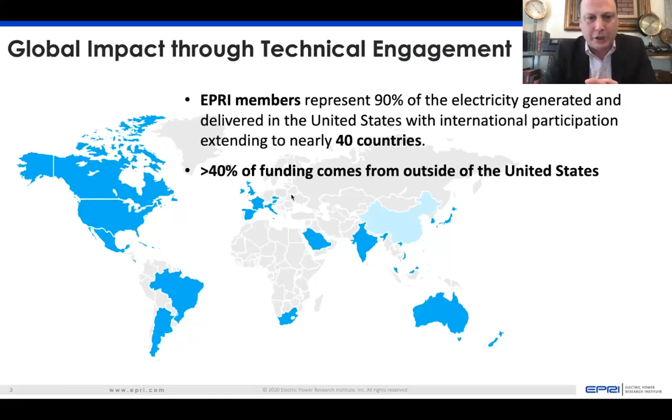Another important note in regards to being an international global research company is that greater than 40% of our funding comes from outside the U.S. So today my focus is on sharing some of the work we're doing in the role of flexibility and heat rate optimization. A lot of the work we do in the future is going to be based on the work that we've done in the past.

When you're looking at thermal efficiency and optimization, a lot of the actions and efforts that CenPEEP, NTPC, and other organizations in EPRI that I've worked with in the past still apply, but we've got to work smarter, not harder, and find ways to utilize the lessons we've learned in the past as we drive the future going forward.

In regards to flexibility, EPRI has been studying flexibility for the past 40 years. Anybody who's a member of EPRI knows that in 2021, we actually have some new programs that are going to be part of our generation portfolio. One of those new programs is on flexibilization as well as heat rate optimization, in our 223 fleet optimization strategy program.

So I want to share some of those visions for how you apply that towards best practices for heat rate and flexibility. There are three different core areas that I think are critical for India, and anywhere around the world, in regards to how you manage a heat rate and flexibility program simultaneously.

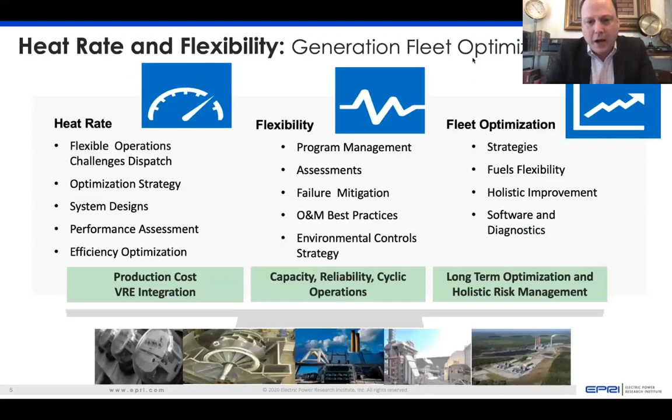Two of the major trends that demand optimization in regards to flexibility, as we heard in the opening speeches today: over 370 gigawatts of total generation in India, majority of that being subcritical, supercritical coal generation. So we've got to be able to sustain that fleet, and we've got to learn to become more adaptable to meeting the mission profile demands of what it takes to keep the grid stable as we continue to integrate more variable renewable energy into that grid.

What that means is that we're going to see a lot of older plants, and even new plants, either in reserve shutdown or cycling, and in some cases two-shifting, which is going to drive capacity factors down. Typically the heat rate trend is, as we drop down below 50% MCR on our operations and our capacity drops, you see an exponential increase in heat rate. So how you manage heat rate degradation, and what your strategy is around optimizing efficiency under flexible operations, is a key area of research that we're focused on.

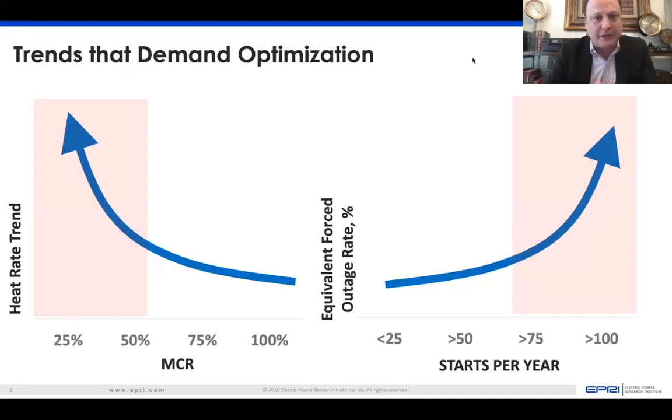But the other side of the coin is that as you have more startups and shutdowns, it's going to likely impact your EFOR. So as we continue to advance new generation and drive new technologies, I think it's important that we understand these two main trends that have to be adapted to make sure we've got a sustainable fleet going forward.

For the past two decades, I've been engaged with the Indian marketplace and worked with NTPC extensively on CO2 reduction programs through DOE initiatives or past USAID initiatives. And I'll say that those same principles we've applied over the past 20 years, whether it's applying the essentials of combustion optimization or heat rate essentials on how you manage a heat rate program and how you track boiler losses and turbine cycle losses, are still important.

We just have to be able to understand how we do that now in a flexible manner. So I think one of the key points in managing heat rate and flexibility simultaneously is to understand how to track those losses and how to track those key performance parameters in regards to both efficiency as well as flexibility. And how you do that needs to be applied into a systematic approach.

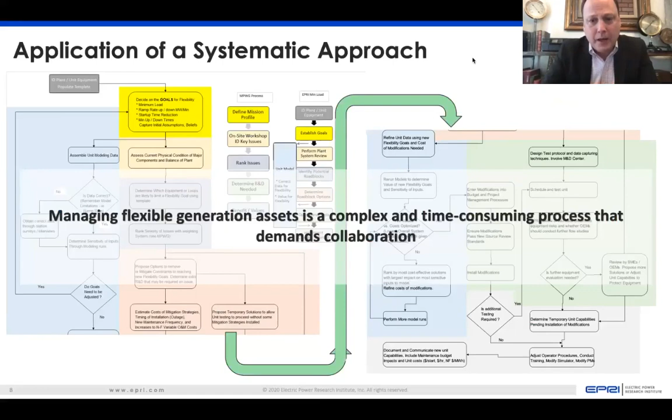Over the last 40 years, EPRI has worked diligently to drive a systematic approach towards flexibilization. That approach is complex, and it's a time-consuming process that demands collaboration. So as Mr. Banerjee shared in the last presentation, the strategy that I have proposed to India to drive improvements in regards to flexible operations is to really focus on the core fundamentals of flexibility.

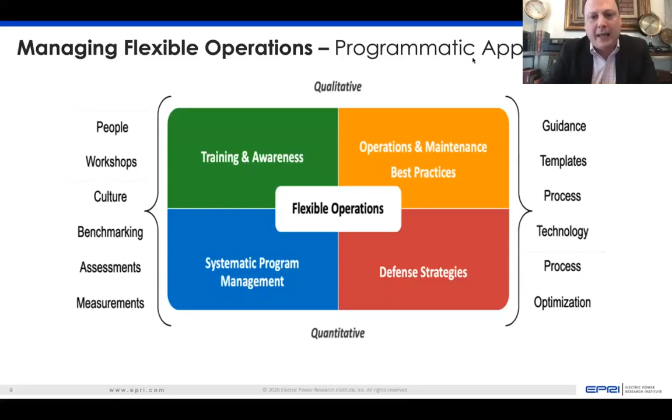Those core fundamentals represent the integration of training and awareness, how you apply operations and best practices to the fleet, what types of systematic program management efforts are required, and ultimately what your defense strategies are going forward - and how you apply those strategies is really how you drive the culture of people. So opportunities and events like this one are an opportunity for me to share that approach.

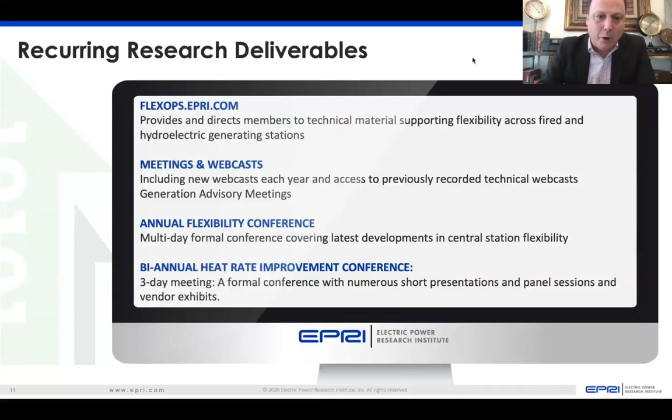So as we go forward in P223, I think one of the key important deliverables will be to continue sharing a database of information from past lessons learned, continuing meetings and webcasts virtually. We're finding that this is the new normal. And then also making sure we have the latest technologies and best practices being presented in both our flexibility conferences and our biannual heat rate improvement conferences that are instrumental to the EPRI portfolio.

So another area, something we've discussed widely in being able to drive those best practices, I think, is using technology and platforms to disseminate those past lessons learned.

Some of the areas we're looking at expanding in P223 is a flexible generation video series that helps visually understand the challenges with flexibility, what that looks like in regards to how you adapt to those changes, and most importantly, making sure industry understands the precursors to those damage mechanisms, so you can help balance and offset the potential implications of flexibility, as you experience more challenges like thermal fatigue and layup corrosion, how you manage heat rate degradation, common operator challenges, and when your units are offline, how you're managing your layup strategy and balance of plant O&M.

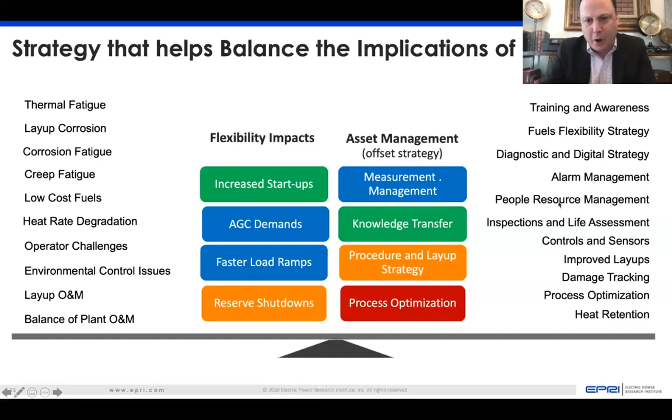So you've got to have an asset management offset strategy that looks into four key areas in regards to measurement, knowledge transfer, and process optimization on applying these strategies to help offset potential damage. But to do so, you also have to have a set of guidelines and templates.

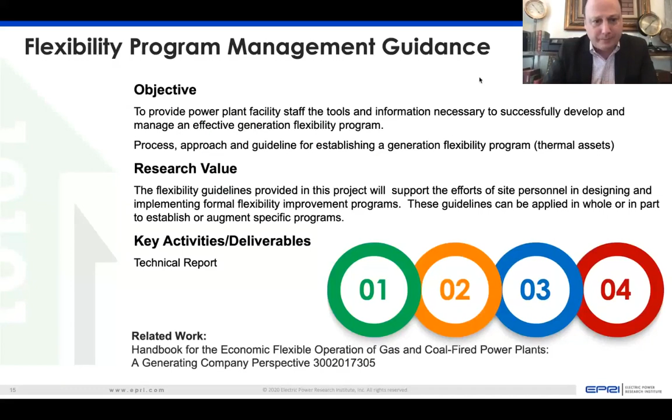Another key focus of flexibility: anybody operating a fleet of generating units should have a flexibility program in place and a set of guidelines that helps you successfully manage that fleet and those assets, taking past lessons learned as we continue to drive the future with state-of-the-art technologies that my colleagues are going to present in the next sessions, as well as some that were discussed earlier with the DOE Coal First initiatives.

That brings us to benchmarking assessments and measurements. If we want to benchmark and manage our assets from a flexibility standpoint, I think the real key is integration of people, process, and technologies, taking a systematic approach, applying it to how we hit those core four components towards achieving resiliency, asset flexibility, and most importantly ensuring viability of the flexibility so that we can drive those key flexibility attributes towards a fleet and make sure we're taking those lessons learned and applying that.

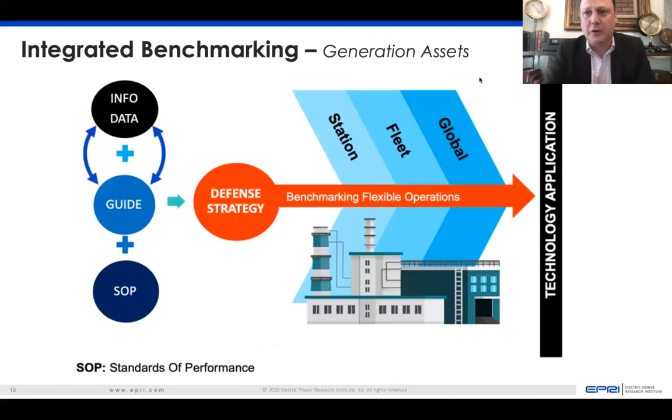One other area we've been working hand in hand with NTPC on, as a true industry leader, is to develop a set of benchmarking templates for conventional steam generators. It's essentially a platform where we can collect information in a timely manner, have a guidance document, a set of standards of performance, and integrate that into our defense strategy to understand how good a job we're doing on managing flexibility, whether at a unit level, a station level, a fleet level, or globally in regards to the overall session.

It's important for me to also acknowledge that this work is a U.S. DOE project supported under the Power and Energy pillar under the India Strategic Energy Partnership, which is co-chaired by DOE's Office of Fossil Energy and India's Ministry of Power.

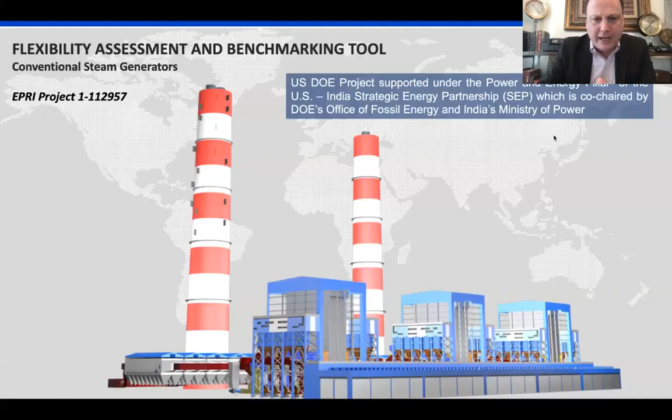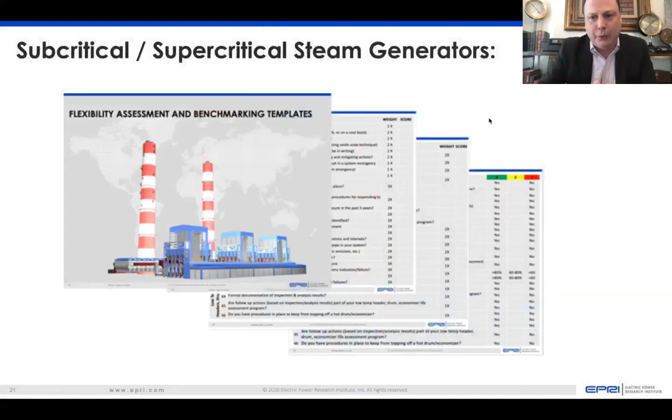I'll give you a quick overview of what that set of templates looks like. Right now we're building a set of templates that includes 10 different templates for 10 different areas of subcritical and supercritical generators, with a process for risk management, taking those lessons learned that we've identified through past work that EPRI has done through the Missions Profile Working Group and through many decades and years of research.

We're integrating that into four core areas in regards to those conventional steam generators: the boiler, the turbine generator, the balance of plant, and environmental controls. So we've separated those four core areas into 10 templates to really focus on how you digest the complexity of flexible operations and how it impacts nearly every part of a conventional steam generator, whether you're talking about the controls, the operating mode strategy, the O&M best practices, or even the cycle chemistry and balance of plant. It's important that we understand these are critical.

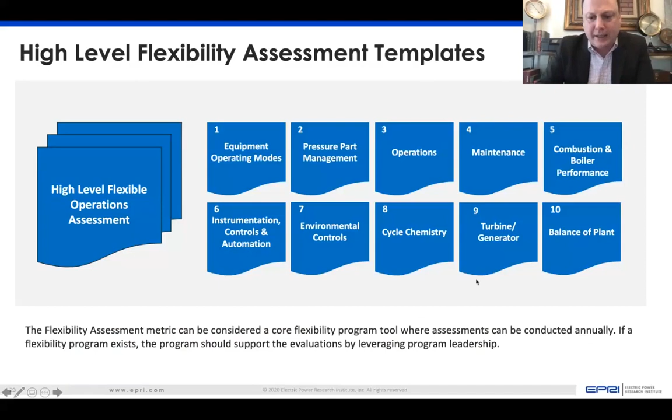Right now, the current status of the tools is over 615 line items of key lessons learned that we have integrated into these flexibility templates, where you have an opportunity to put a weighted value on different component areas that need to be addressed. When you do an annual assessment, you can classify that, and ultimately it's a tool that helps scorecard your performance in regards to flexibility.

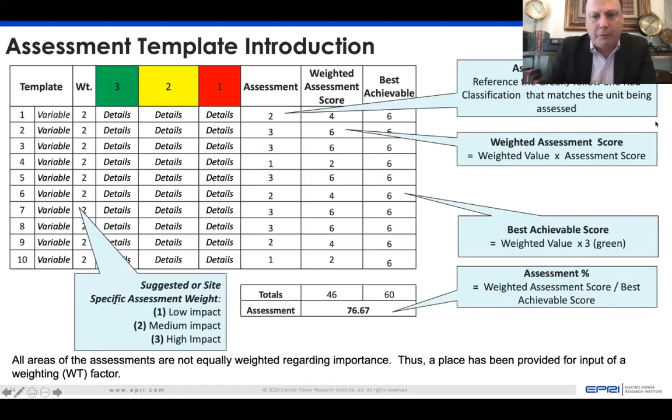So when it's all said and done, to be able to manage a fleet's flexibility, you can identify potential gaps or degradation in certain key areas so that you can understand where you really need to prioritize your resources and teams to become more flexible, and how you can mitigate some of those damages or precursors to damage mechanisms before they become a more significant problem. It's essentially a tool that has a multi-directional purpose. The flexibility tool can be used for risk management.

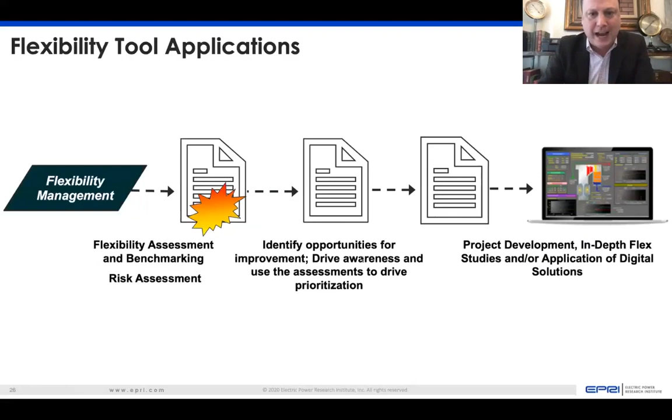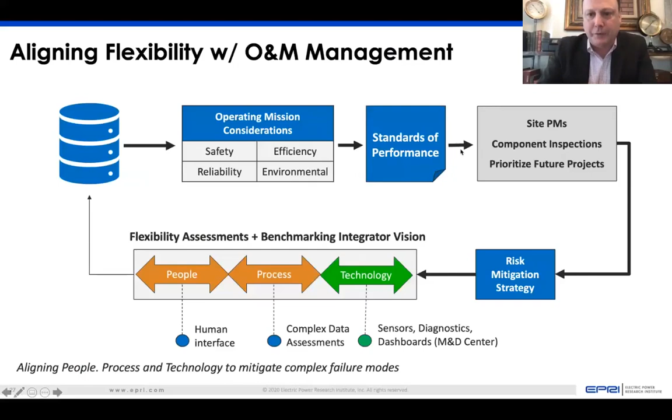If you integrate this approach of applying standards towards people, process, and technology, you can drive this into your risk mitigation strategy along with a database of information over time that supports the EPRI mission, which is also the mission of most utilities and generators I've worked with: to generate safely, reliably, efficiently, and environmentally consciously. Then you can take those lessons learned as standards, prioritize them, and drive that into your future project developments or future research.

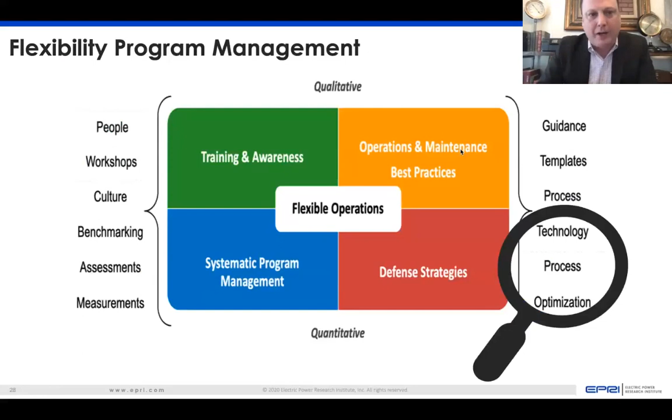The 4th quadrant of the core 4 fundamentals of flexibility is application to defense strategies. This is where technology and process optimization comes into place to help us take our aging fleet—many units in the U.S. are over 40 years old on conventional steam generators, and there are many older units in India too, with uncertainties on whether they're going to operate for 5 years or another 25 years.

So if you want to operate flexibly with an extended amount of life, you've got to take a look back in time. I'll share a scenario of GADS data, where we looked back at 35, 45 years of data of units that had 40 to 50 starts per year operating under a very flexible operation scenario. You can see the boiler is where you'll see a number of the potential damage mechanisms appear, and this is also my experience over the past two decades.

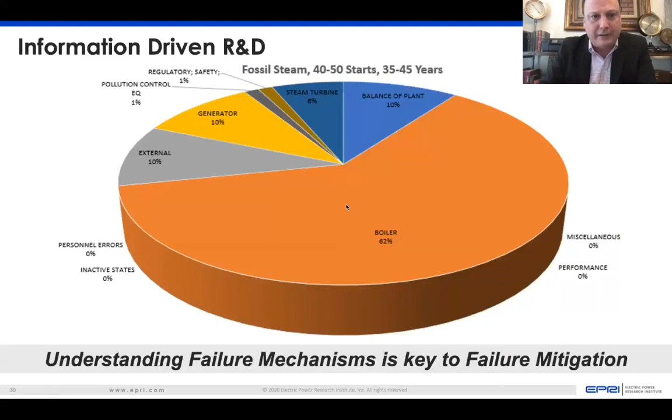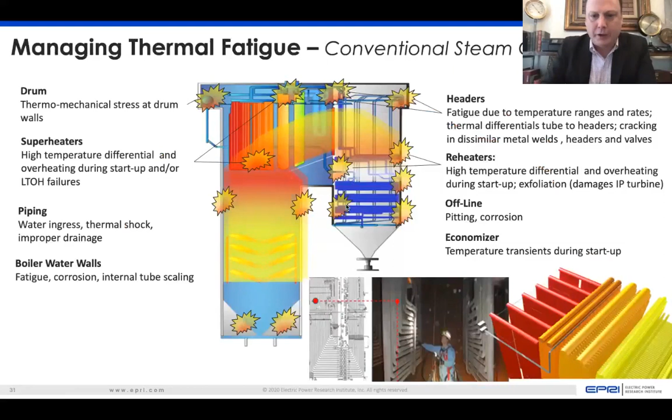So implementing fundamental approaches based on lessons learned—how you manage thermal fatigue, where the critical thermocouples are, what are the critical temperature differentials from side to side, left to right on major components, what protection systems you must implement and maintain to preserve performance—all that for a given set of standards of performance that take into account material temperature ratings, heat transfer, velocities, and circumstances that may relate back to a site-specific challenge.

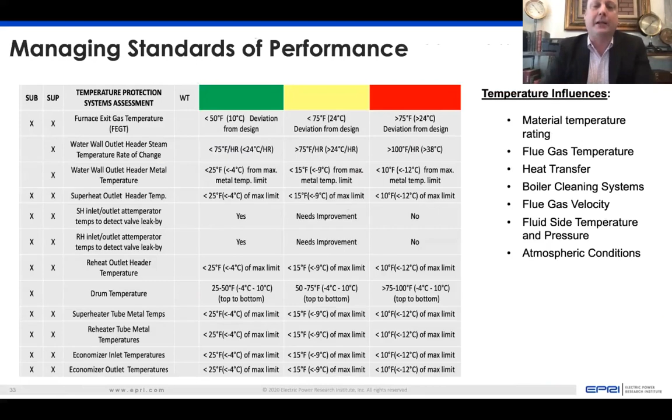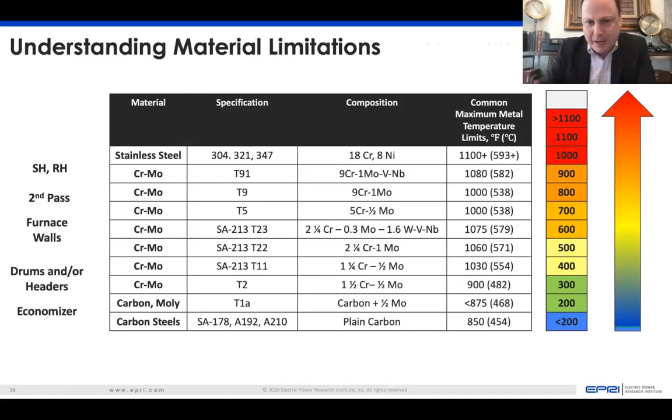For example, in India, how you manage a component with ash deposition and flue gas velocities is critically important for mitigating erosion. As we do that more flexibly, the standards are going to change. So I think going forward it's important that our operations and maintenance teams understand not only the component temperature limitations but also the material limitations, and the KPIs we've got to take into account when doing life expectancy evaluations on how we sustain this fleet going forward.

That might integrate things like superheat and reheat outlet thermocouple headers, making sure we're maintaining those economizer temperatures on headers, or pad weld thermocouples on superheat and reheat outlet headers as a low-hanging fruit, cost-effective approach to managing those pressure part and components.

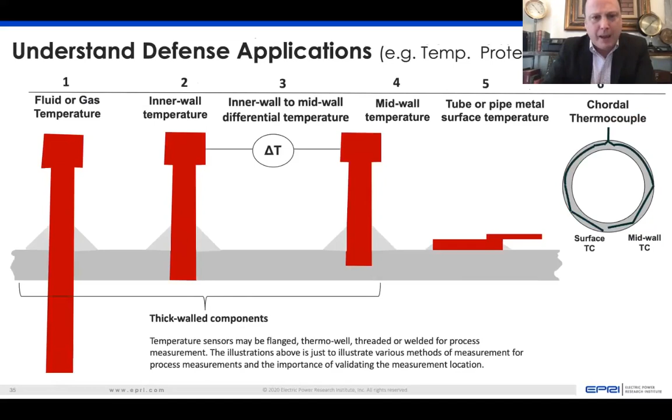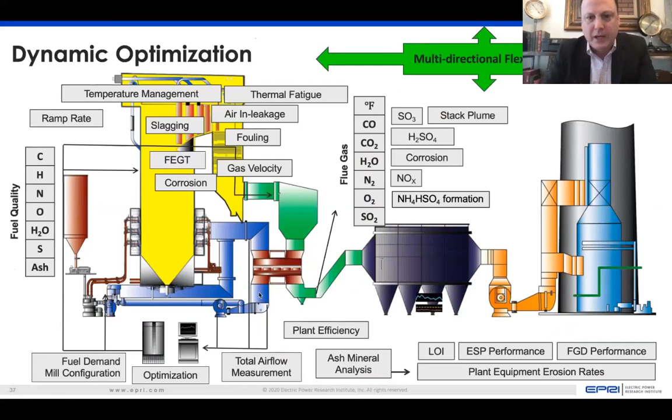But the key is to work smarter, not harder, and to manage your data and information through opportunity assessments—whether through a static approach like we're developing with the benchmarking and assessment tool, or in real time, taking that data back to a monitoring center and using it in a more dynamic optimization program, whether in our controls or a closed-loop controls optimization scheme that looks at the systems holistically—not only efficiency and heat rate, but also overall holistic optimization of environmental controls performance, as well as the reliability of the unit.

So I know time is limited, so I will stop there and stop sharing my screen, Mr. Gupta. I'll give it back to you.

Thank you, Mr. Storm, for your presentation. I think many of the delegates would have been looking for solutions from you in terms of step 1, 2, 3, 4, 5, 6, how to improve efficiency. But EPRI has once again demonstrated that solutions to complex problems is a long process. You have introduced us to the different templates and the collaborative working which all the individual utilities have to do, and there has to be a database, and with that database we will jointly arrive at what will be the solution. Thank you very much, Mr. Storm, and I think our participants will ask questions at the end of the session.

Now we move forward. We will go to the second presentation. It will be by Dr. John Shingledecker, and he will be focusing on R&D considerations on materials for advanced generation. His brief intro: he is a senior technical executive at EPRI, and he has been leading key technical projects in materials and manufacturing for new advanced emerging generation technologies. His current research is focusing on nickel-based structural alloys for various generation technologies. So I will not take much of your time. Can I ask Dr. John Shingledecker to start his presentation? Over to you.

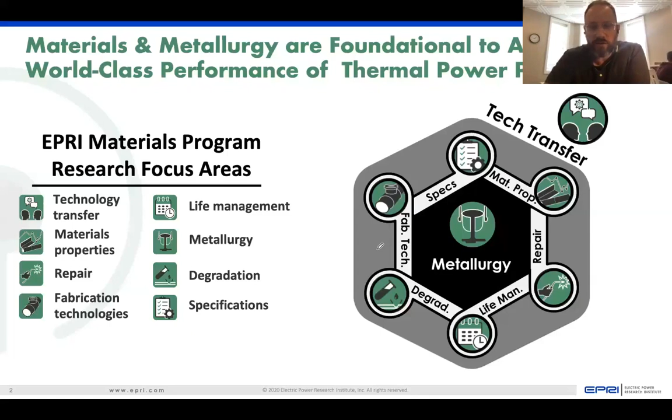As a little bit of background, my colleague John Siefert manages our new program 229. Those who were involved in India before know program 87, the materials and repair program. The fundamental reason for this program's existence is to transfer materials technology into utilities. That can be in the area of things such as best practices for material selection, fabrication guidance, welding, and repair. We do a lot of work on failure investigations and a database of failure analysis so that we can inform appropriate root cause and corrective actions.

And the team that we have at EPRI, not just myself and John, but a whole range of experts in the area of corrosion, high temperature metallurgy, advanced steels, etc., is really a value to, I believe, the entire industry.

I'm based out of our EPRI offices in Charlotte, North Carolina, where we also house quite a number of laboratories. For those who are perhaps familiar with EPRI, we know we do a lot of our research with a number of collaborators, and collaboration is a key aspect of our research, and we are able to bring the best and brightest from around the globe.

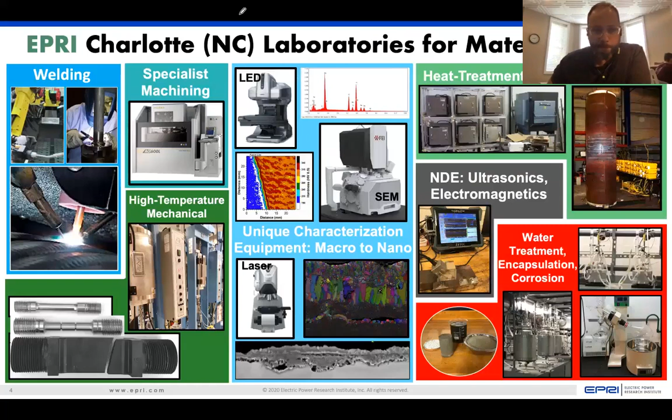So getting into it, the backbone of the ultra supercritical fleet, the newest and most advanced plants that India is operating today, are what we call creep strength enhanced ferritic steels, and in particular grade 91 steel. There are others, grade 92, etc. This material achieves tremendously good properties, high strength, good resistance to fatigue, etc., when it is properly fabricated, welded, heat treated.

However, the control in the fabrication, all starting at the melting practice of the metal all the way to the field post-weld heat treatment, has to be rigorously controlled. And if it is not, you can lose substantial performance. Over 15 years of research in this area, we have a publicly available guideline which everyone should download that covers the key things you need to know about the manufacture and construction of grade 91 steel.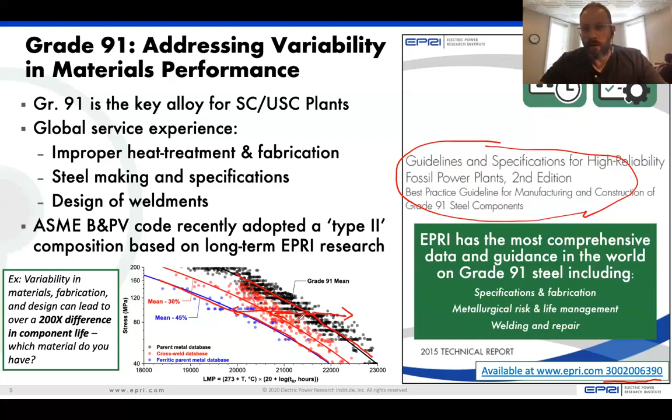Because of the need to repair materials like grade 91 steel, we have spent an enormous amount of effort understanding the metallurgy of grade 91 steel and welding repair. Typically, as in my example before, improper post-weld heat treatment may reduce life by an order of 200x. We have worked to develop processes and procedures that do not require post-weld heat treatment. These have been codified in the National Board Inspection Code as Welding Method 6 and Supplement 7, and these techniques are now being used globally.

We know of some limited instances even in India, but we know of instances around the globe, and in particular in the United States, we've documented over $10 million in savings a year for some members using these techniques that don't require post-weld heat treatment. It's risk mitigation for improper heat treatment as well as reducing the outage cycles.

So as a tool in the toolbox, innovative repair strategies can save time and money and actually increase safety when done properly, and we have a lot of guidance in this area. This is an area that really should be on the forefront of the mind as you're operating supercritical power plants.

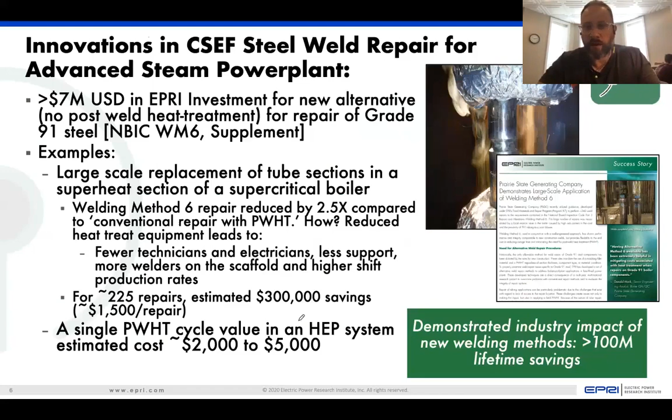Some of our ongoing research, which I think is very useful to the Indian audience, is the advanced stainless steels. The superheaters and reheaters, Steve showed a very brief clip. As you get to higher temperatures, no longer can you use the CSEF steels in the reheaters and finishing superheaters of these supercritical units, because the temperatures have gotten so high.

And so these steels undergo metallurgical changes with time. While we have legacy documents on guidance for traditional stainless steels like alloy 304H or 347H, there are many new materials, Super 304H being one of the key ones, HR3C and 347HFG being the others.

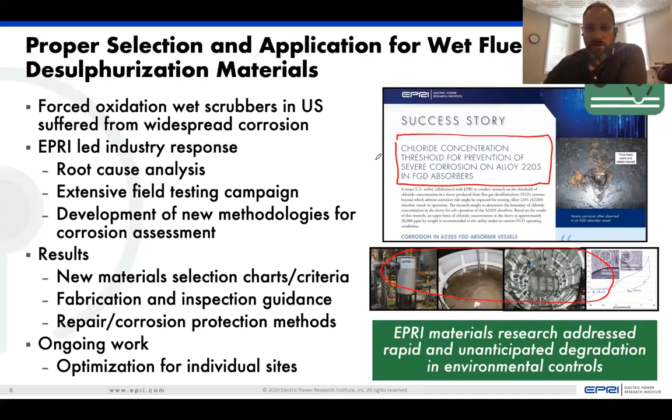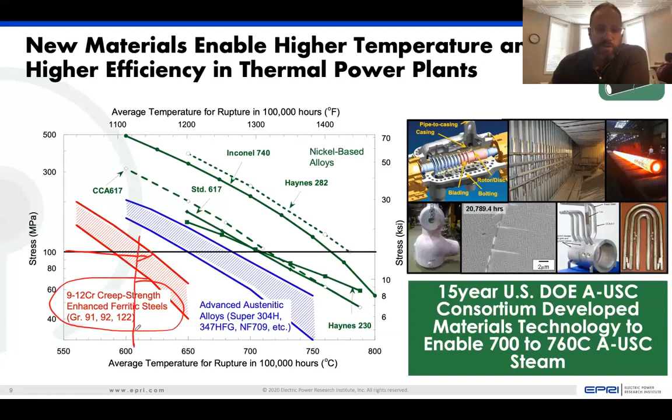To move to the future, we need to use things such as nickel-based superalloys. EPRI has been involved as the technical lead for the U.S. Department of Energy's program for advanced ultra supercritical, which has developed the materials technology to enable AUSC.

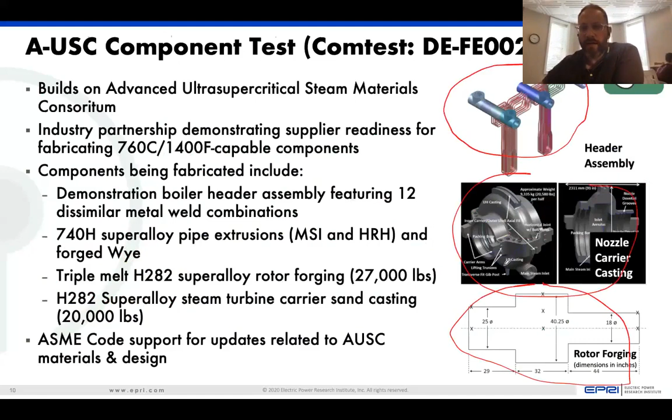Our current ongoing work in the area of AUSC, building on 15 years of foundational materials research, is a demonstration activity around various key components in AUSC. We call it the AUSC component test, or Comtest. We're building a large header assembly, demonstrating large castings, and demonstrating large forgings. This is really to build out the final pieces of the supply chain to enable AUSC technology.

Finally, as we look further into the future, there are many new technologies on the horizon, and the AUSC materials technology is foundational to those. These can be things such as supercritical CO2 power cycles, concentrating solar power plants. There are new manufacturing methods now coming on board, like additive manufacturing, or 3D printing as it's sometimes known, for metals. All these technologies require an in-depth understanding of materials and selection to properly enable more advanced technology in the future. So we have a lot of ongoing work in these areas to really support and shape that future of electricity.

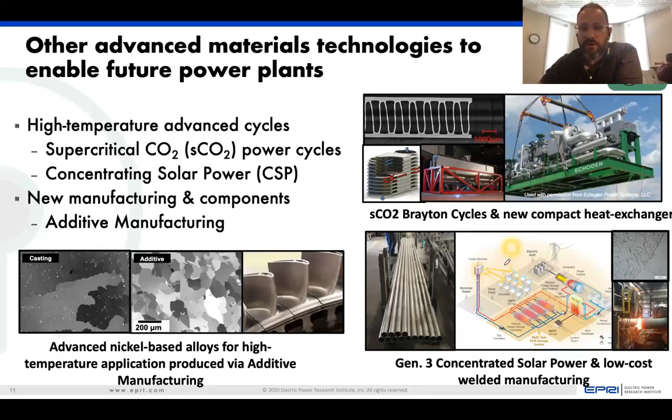As Mr. Gupta mentioned right at the beginning of the talk, materials really cross-cut from the current life management of plants to future advanced technology.

Just to give you a flavor of what we're doing in our research today, we continue to work on advanced steels. Advanced steels did not stop with grade 91. There's now grade 92, grade 93, some new Thor 115, and Super VM12. Many of these alloys have never been independently vetted by anyone other than the manufacturer. So EPRI is doing a lot of research to look at these materials and understand the behavior of welds, the behavior of multiaxial creep damage, and looking at innovative repair approaches for these materials.

I mentioned already our work on advanced stainless steels, and we have a lot of tools to help utilities enter this technology. So with that, I'd like to wrap up and move on to our additional talks.

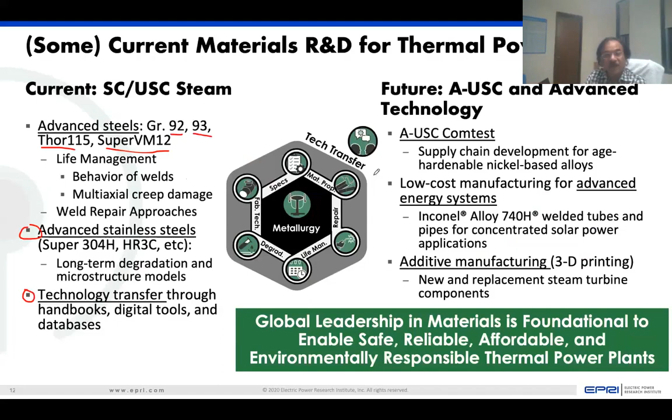Thank you, Dr. John Shingledecker. I think you have given us a very good flavor regarding the appropriateness of the materials which we select for our supercritical and ultra supercritical boilers. Reliability is very, very important for all these ultra supercritical and supercritical boilers, and materials not only withstand high temperatures and give us efficiency, but reliability of these materials is also very, very important.

You have very rightly said that grade 91 steel is the key. Super 304H is the key, and in some of the plants in the Indian power sector, we have faced exfoliation problems. We have also found indigenous solutions to deal with those exfoliation problems, but that is a problem in T91 exfoliation. One advance warning I think you have given to the Indian power sector is regarding proper material selection for wet FGD. I think we need to look into that, because India is going in a big way for wet FGD. In the coming years, we will have wet FGD in most of our plants as a prerequisite of environmental compliance.

I think we need to relook at whether the appropriate material selection has been done. Future in material science belongs to the nickel-based alloys. Additive manufacturing is the new destination.

I think the crux of your presentation was that we need to pay a lot of attention to material specification, manufacturing, fabrication, heat treatment, welding and repair. If we want reliable working of our powerhouse, in both boiler and turbine, we need reliable materials. Materials failures can be very costly to a utility.

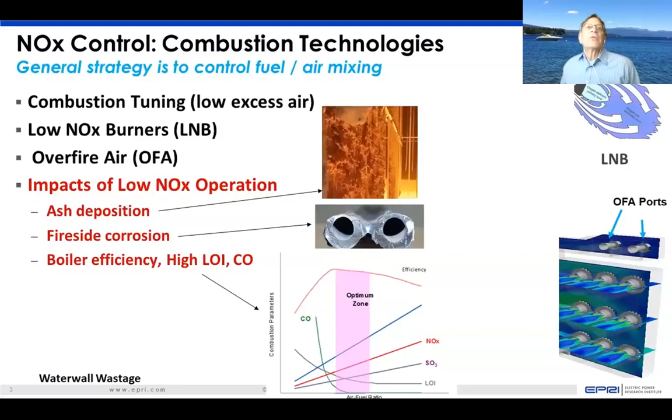And that's, of course, easier said than done. But from a high-level overall perspective, that's the overall goal. How do we go about doing that? And how do we expand the width of that zone so that we're able to achieve all the emission requirements at the same time without compromise to the plant performance or plant reliability?

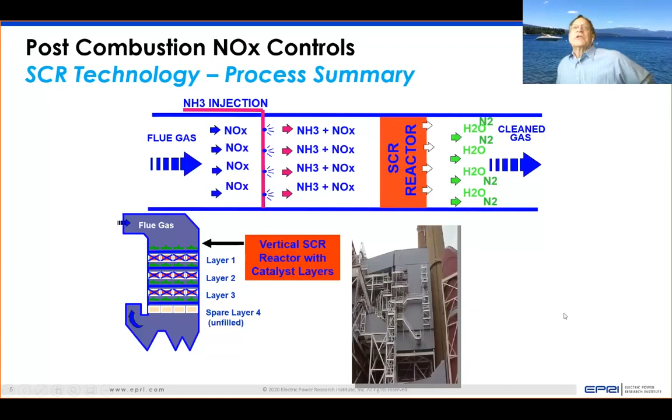Okay, so this shown here is the overall mechanism for how an SCR works, and just looking at the reactants and the products, it's very simple without looking at the intermediate reactions. You have the NOx coming in, and the reagent is typically ammonia, NH3. So the NOx and the ammonia combine, and that leads to basically water and nitrogen. That's basically, in the presence of a reactor, how an SCR system works.

So what we do at Electric Power Research Institute within the program is spend a lot of time looking at issues specific to improving SCR performance. Top of the list is fuel quality. In India, as SCRs are being seriously considered, the number one issue we see is the very high levels of ash in Indian coals. In the United States, with our coals, we have a lot of problems with sulfur and arsenic leading to SCR catalyst poisoning. But ash, we believe, will be the number one issue when SCRs are installed with Indian coals. The problem with ash is that it basically masks the catalyst, so the reaction is compromised.

Other issues we're seeing involve flexible operation and load changes. As you go down in load, the temperature to the SCR system also goes down, and as the temperature goes down, that can create a reaction which deactivates the catalyst. There's also ammonium bisulfate deposition on the catalyst pores, which is again a deactivation mechanism. You also have high excess air and flow distribution problems. These are the challenges we see as we move to a flexible mode of operation for the SCR.

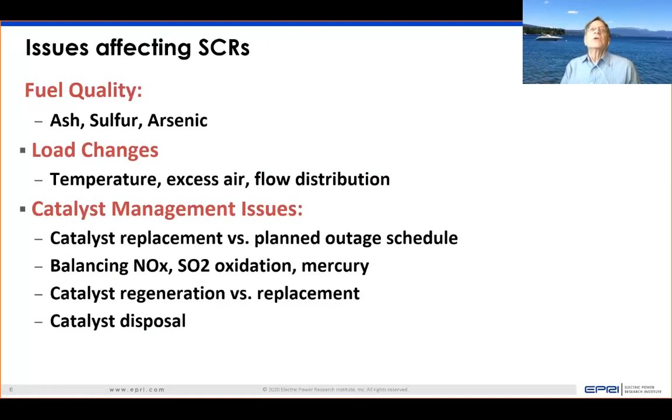Another component of the environmental control train shown in the overview slide is the electrostatic precipitator, or ESP. Most of us are familiar with ESPs. Here is a very simple operation: basically we charge the particles, ash for the most part, just upstream of the ESP, and then they're collected on the grounded plates. Every once in a while those plates are shaken, which we call rapping, and then the ash is taken down into a bin and carried off. It's a relatively simple operation, and they've been around a while.

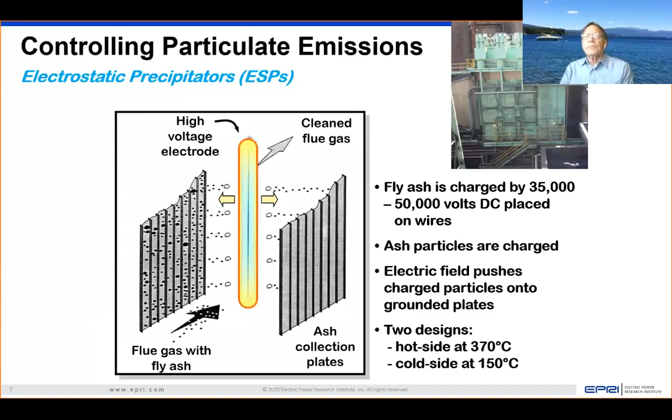High levels of ash mean there are going to be some challenges with that. But my understanding is that one of the solutions that has solved the issue in many plants in India is to just go with very large ESPs. The more ash you have, the larger the ESP you need.

Here are some of the issues we see with ESPs, categorized into three areas. First, upstream conditions, where changes in fuel quality are probably the biggest. If you have a fuel that's changing, the resistivity of the ash going into the ESP may change, and that will change the collection efficiency of the ESP itself. So one has to be cognizant of that.

Here in the States, we like to add chemicals to our flue gas to control metals. That may or may not happen sometime in the future in India. That creates more challenges for ESPs because in addition to removing the ash, one also has to remove the chemicals and dispose of them in a way that avoids leaching into the groundwater.

And then, as I mentioned previously, changes to upstream conditions—excess air, temperature distribution—all of this needs to be considered as flexible operation or changes in fuel quality become prevalent.

The other two areas, in the interest of time I won't cover in too much detail: scheduled maintenance, where best practices are needed, and electrical equipment related issues. To compensate for high resistivity ashes or fuels, we're looking at advanced power supplies, et cetera. These are again issues that get back to fuel quality and the challenges brought about by lowering fuel quality to the environmental control system.

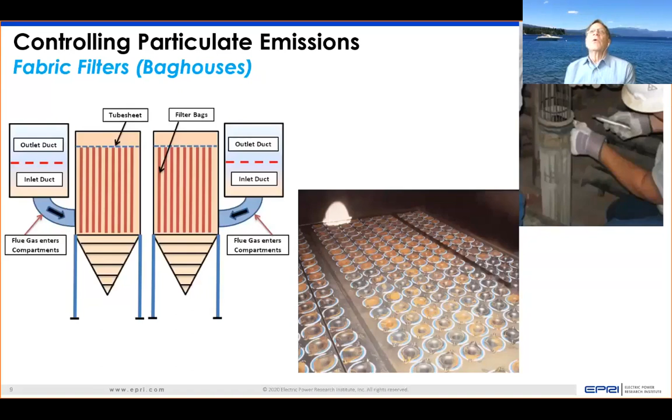One of the challenges we're looking at here is bag life and materials—how can we get the materials of these filter bags to last longer so we lower maintenance requirements and keep the unit in operation? Just like you don't want to take a unit down to change your SCR catalyst, you certainly don't want to take a unit down to change your filter bags.

So we like to work with our funders and say, well, if you need a wet FGD system, we'll work with you on that, and we'll ensure that the specifications of the FGD system are consistent with your needs.

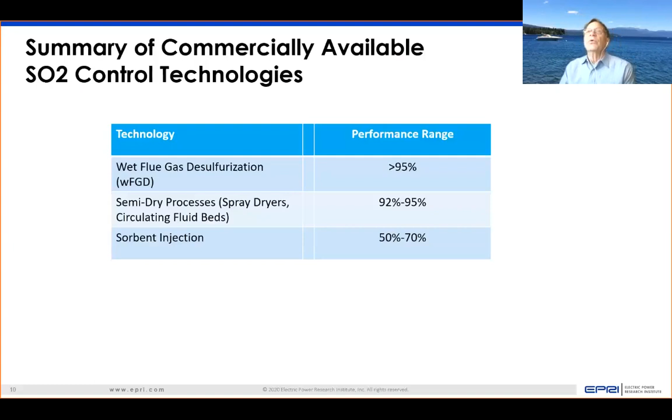However, in many cases, there are significant savings if you go to an alternative approach, if you're able to do that with your fuel and your regulatory requirements. The two listed here that I'll cover briefly are what we call the semi-dry processes, which can give you about 92-95% removal efficiency, and then sorbent injection, which can give you from 50 to say 70% removal efficiency. We'll look at each one.

We'll start out with the lowest cost method, which is injection of an alkali sorbent. Either hydrated lime is probably the most prevalent, that's calcium-based, or sodium-based sorbent is also used quite extensively in the United States. Trona is an example of a sodium-based sorbent.

The main issues we look for in sorbent injection, to do a better job, is the efficiency. A sorbent injection system, the capital cost is relatively low. The expense is what you pay for the sorbent. So what we look for is ways of improving the mixing between the sorbent and the flue gas, and in doing so we can get maximum reduction in SO2 in a way that minimizes the amount of sorbent that's needed.

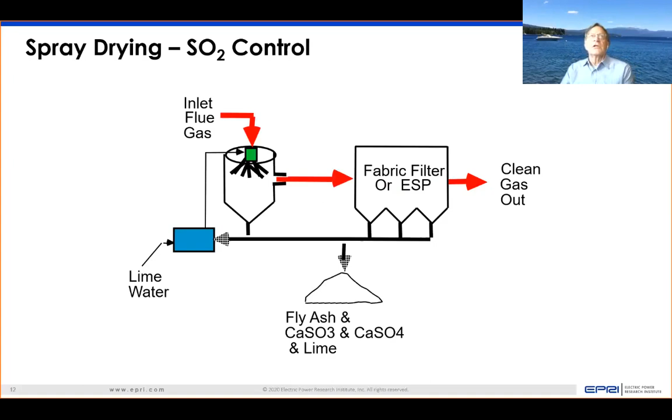I think in the States, I'm going to say maybe there's about 10 to 20 applications of semi-dry processes, not necessarily spray dryer, but semi-dry processes. And that takes us to the wet FGD.

And what I'm showing you here, this is a busy slide. I have a few more that maybe are easier to read. But this is showing the main components of the wet FGD system. You see going into the wet FGD on the left, you see you have your flue gas containing the SO2.

That is in a vertical cylindrical wet FGD system. That rises, and then coming down from the top would be your slurry, and that slurry is generated in the pond, if you will, at the bottom of the wet FGD, and that is containing your lime or limestone mixed in a fluid stream that is through the slurry pumps brought up through the injection nozzle and using atomizers sprayed into the system.

Mr. Anthony, please finish in a couple of minutes.

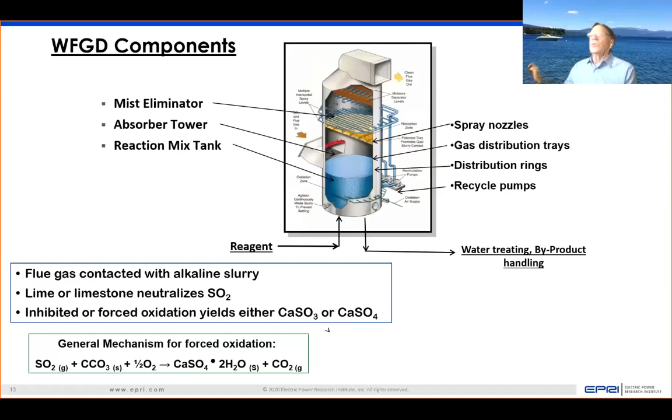Oh yeah, I'm done, this is my last slide. Shown here at the bottom is the general mechanism. You see there's two approaches: one is inhibited oxidation, one is forced oxidation. The forced oxidation will generate gypsum, and the gypsum can be sold.

So here is a picture showing the components surrounding the wet FGD. What we're seeing here is how the reagent on the left is prepared and injected into the wet FGD system, and then on the right we see how the water is taken to the water treating system and how the ash is then disposed.

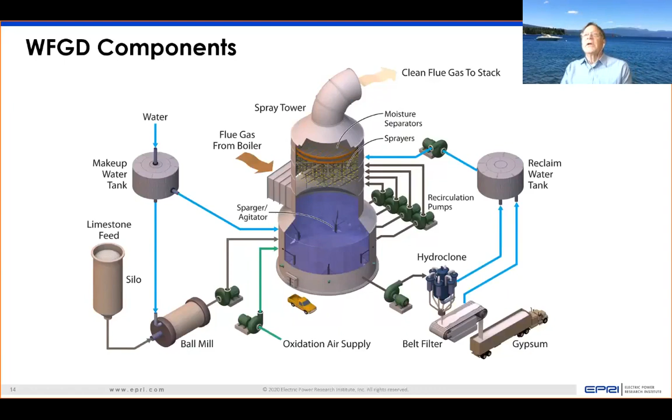And just listed here, and this is the last slide, it just shows the issues that we find with wet FGDs. One of the areas of big concern now is limestone. Limestone is a key component. It's very expensive, the use of the limestone is very expensive for FGD. So a lot of plants are looking at lower cost limestone. Unfortunately, lower cost limestone does give issues with the performance of the FGD.

Other areas certainly include flexible operation. We do see quite a bit of issues at lower loads in operating the FGD system. And then, as John mentioned, I unfortunately don't have time to get into it, is issues associated with FGD materials. And with that, I believe that is the end of my presentation.

Thank you, Mr. Anthony Facchiano. I think the topic which you dwelt on is a very, very relevant topic to India today.

In our power sector, we are going in a big way for NOx and SOx control. Particulate matter control is something which we have been doing. Indian coal has a very high ash content, so our ESPs are pretty big, as you rightly said. But we have been doing it effectively for particulate control.

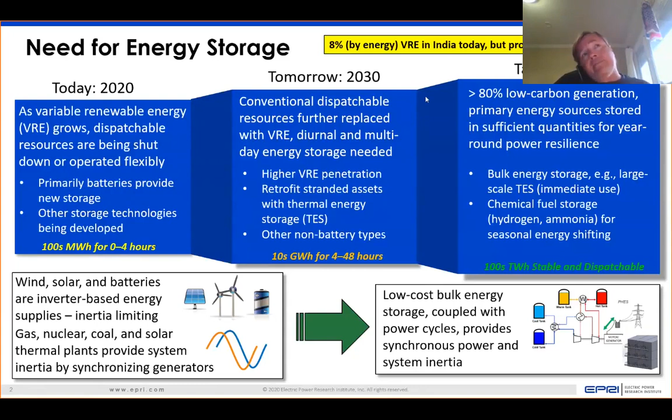And when you move in that space, you're going to need a fuel to be able to provide that energy storage for longer periods, even up to seasonal. And many people are looking at hydrogen and ammonia and other low-carbon fuels for that. So a key to what I'm going to talk about is trying to come up with lower-cost bulk energy storage, and in particular, if it can take advantage of the huge fleet of coal power plants that are in India to reduce costs and maintain those rotating assets.

So these are the different types of energy storage. This should be clear to everyone, but chemical energy storage is things like a fuel, like hydrogen. Electrochemical are batteries, like lithium-ion batteries, and actually there is a lot of potential battery installations ongoing in India, including a projected 10 gigawatt hour, which would be the largest battery in the world if it does get built.

There are mechanical types of energy storage that include pumped hydro and compressed air energy storage. There's quite a bit of hydro in India, but the issue with mechanical forms like pumped hydro and compressed air energy storage is they're geographically limited. You need the right geology for them to be employed, and much of the pumped hydro opportunities have already been used in India, and finding the space and geology for compressed air energy storage has been a challenge.

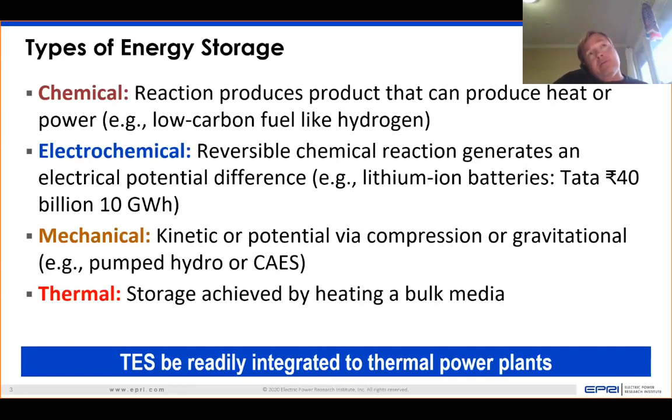So another form is thermal energy storage, which is basically heating a bulk media and then recovering that heat by heating a working fluid. This is a form of energy storage which can be quite large.

This is a chart that shows duration of energy storage versus the amount of output. On here you'll see a bunch of batteries, including the largest battery in the world, which is actually in Australia right now, about 100 megawatt hours. But if you're going to need large amounts of power and longer duration, pumped hydro really serves that right now in the world. But with the ability for it to grow being limited, you can see that here's a pumped hydro site that's 300 times the size of the largest battery right now.

But in this area where you need larger scale and longer duration energy storage, thermal energy storage really will have some play, particularly since it can integrate with coal and gas. So it is very cross-cutting.

It can be used like combined heat and power, where you can take heat from anything that can provide it. That could be coal, that could be gas, that could be concentrated solar, it can be nuclear. It can even be solar PV and wind if you convert this electricity into heat. And this is actually happening in some places in the world. It's not particularly efficient, but it can be done very low cost.

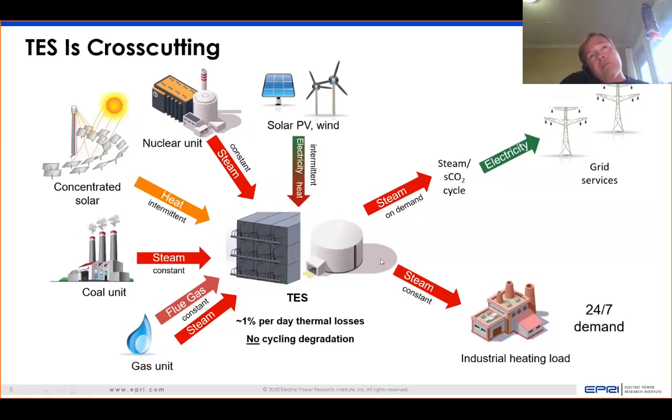You convert this to heat, you can store the heat in a variety of different systems, and then convert that back to a working fluid, which is typically steam. It can also be air, it can also be supercritical CO2 to produce electricity, and you can also use that working fluid to produce heat. So the system is very flexible and something that most power plant engineers would all understand because the systems will look familiar.

So here's a potential deployment of thermal energy storage where you have a coal power plant that has been pressed by renewables to no longer operate at where it was designed at base load. It's now operating at a much lower capacity factor.

The intermittency caused by low-cost renewables requires this plant to start up and shut down often, ramp, have higher maintenance costs, shorter lifetime, and higher emissions on a per megawatt hour basis. So it's just not running the way that it was designed to, and it becomes very expensive and inefficient. So if you take several of these units

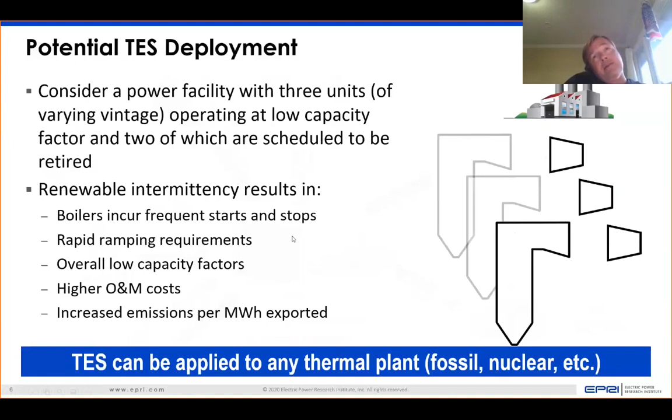and take them offline and decommission them, but keep the steam island still in place, you can install thermal energy storage and keep one of the units operating, which will now operate more like a base-loaded unit at high capacity factor. It will operate all the time, and when power is needed on the grid, it will be put on the grid. When it's not, it will be charging this thermal energy storage system. But then when it operates, you actually now have something that looks like a peaker plant where it's driving the steam islands from the decommissioned units, and the coal plant is still operating.

So EPRI has done a lot of work on this. This can be extremely cost effective. The cost of storage is about 1/4 to 1/6 the cost of a standalone battery. And the benefits of integration in terms of improving how coal is used in the country are significant.

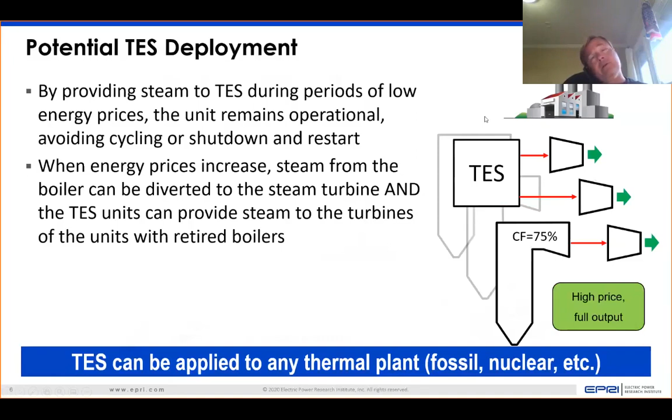Over time, if this coal has to go away because you need to continue to lower carbon, this can then get heat from renewables, from solar and wind, through an electrical heater, which won't be nearly as efficient. Typically, these are 80 to 90% efficient when you're using heat from a power plant. When you convert it from renewables, it drops to about 30%. But the costs are dirt cheap because you already have this in place and it's using existing equipment.

So here are some examples of thermal energy storage systems which are being advanced. Most of them use a cheaper storage medium. The molten salt system is the only commercial one, and this uses a thermal media which is very expensive, molten salt, thousands of dollars per ton.

Trying to replace that with something like concrete or sand or gravel, which are much cheaper, much more prevalent, dramatically reduces the cost. So EPRI has been doing work on concrete thermal energy storage, sand, which gets blown around through a heat exchanger, a fluidized bed heat exchanger. We've also looked at pumped heat energy storage, which uses thermal energy storage as part of it, but has a standalone power cycle in it, which is reversible, that either creates heat by compression to be stored in these cycles,

or takes that heat to rotate a turbine to generate power. These are standalone AC to AC direct competitors to a battery, and have real inertia and will be cheaper and smaller footprint, and liquid air energy storage, which has some analogies to compressed air energy storage, except that you store the air not compressed underground in the gaseous phase, above ground in liquid phase, so that you're not geographically limited.

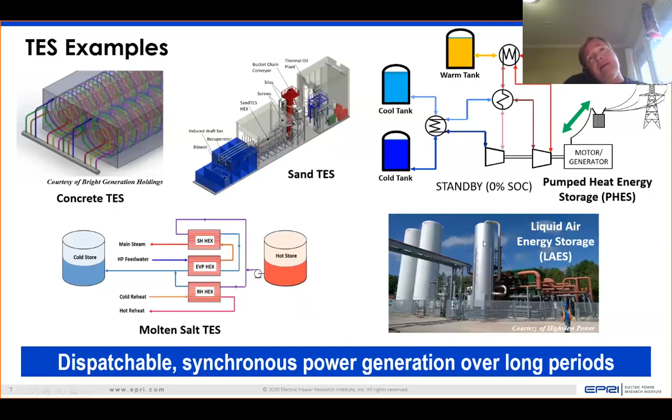So just quickly, one of the projects that is being advanced to be commercially ready by about 2027 is concrete thermal energy storage. It's a very simple system where you have concrete blocks that are laid down that have steam or another working fluid running through them to heat them up, and then water or another working fluid running through them to take the heat when you want to generate power.

The material is very cheap. It's very prevalent, so there will never be shortages of it, unlike lithium, which might have shortages for batteries. You're never going to run out of concrete. And this design with the coiling has been shown to avoid the thermal cracking from the different expansion rates of the metals and the concrete.

So concrete has been very durable for thousands of years. The Romans invented it, and there's a picture of the Pantheon. It's still standing after 2,000 years. There's no moving parts. It's completely transportable, so it's relatively simple to install and operate. And because these can be stacked, it's a pretty small footprint.

So this is a project that EPRI is working on where we're testing a 10 megawatt hour scale system. This would be using commercial blocks. There's actually 54 of them required to make 10 megawatt hours. So if you want to go to 100 megawatt hours or a gigawatt hour, you just add more and more blocks, so that scaling up to do longer and larger durations is very cheap, because you're basically only adding concrete and piping.

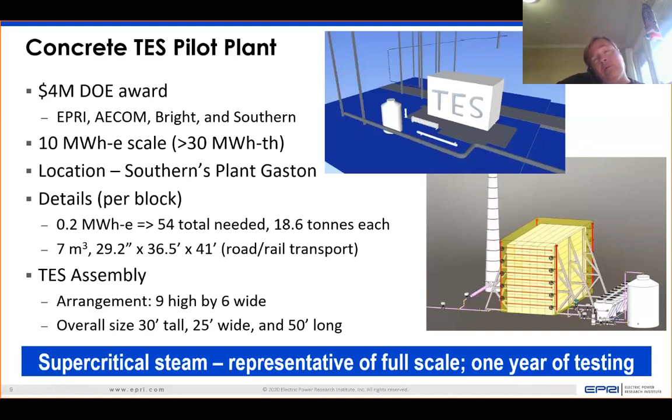So with that, I'll stop and turn it over to my colleague, Dr. Bhown.

Thank you, Dr. Andrew Maxson. I think you have given a very good presentation on the energy storage facilities which will be available in years to come. At present, as you rightly said, we are focusing on lithium-ion batteries, but for a bigger scale of storage, larger scale of storage, I think we need thermal energy storage.

We already have the molten salt storage available in thermal energy storage commercial units. I think that is already available commercially. You have talked about the concrete TES. You have also talked about liquid air energy storage. So I think you have given us a glimpse of the future.

When the future will be like this, maybe by 2030, 2050, all these storage technologies will be very mature, and these technologies will be helping us integrate more and more RE and provide stability to the grid. Thank you very much for providing the insight to all the delegates.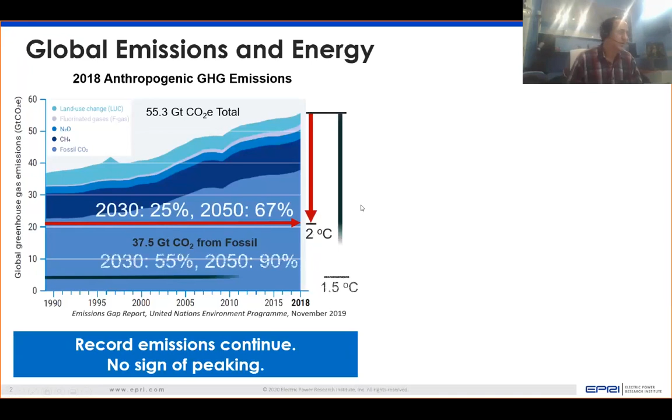If you're looking at a 1.5 degree scenario, you're looking at reducing emissions by 55% by 2030 and 90% by 2050. So given the last, let's say, 20, 30, 40 years of trajectory, it's really difficult to see how this can be managed without some drastic changes. And those drastic changes, again, are not in the distant future. They really are upon us.

The reason why this is happening is because our primary energy consumption is driven by fossil fuels. This is the picture of the total world energy consumption in units of cubic miles of oil. So rather than thinking about barrels of oil, you can consider a cubic mile of oil, and you can project that energy unit into different kinds of energy. But if you take a look at this picture, you'll see that oil, coal, and natural gas comprise the overwhelming majority of energy consumed in the world. These other forms of energy are less.

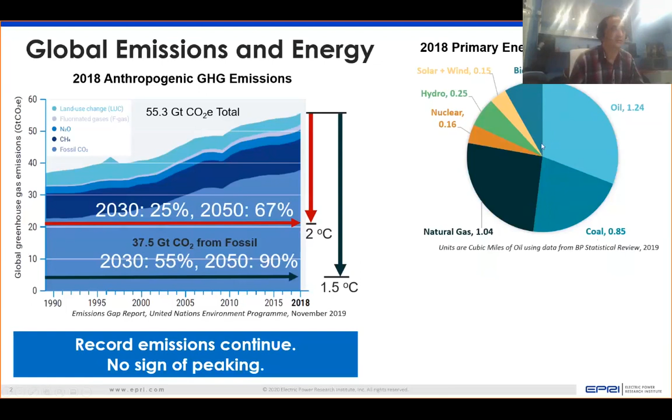Solar, wind, and renewables are making very important and good strides, but it's not yet been enough to contribute significantly to global CO2 reductions as much as what's needed. If you take a look at the units, the amount of energy used over the last 12 years or so went up by 25% - energy consumption today is around 4 cubic miles of oil, compared to 3.2 back in 2006.

Interestingly, the market share for fossil fuels, the amount of energy we use from fossil fuels, has remained roughly unchanged at 80%. So the growth in energy we saw was still overwhelmingly supplied by fossil fuels. This means globally, fossil consumption is outpacing our energy decarbonization efforts. Looking at the next 10 years compared to the previous 12, it's really difficult to see how these things could be managed given our past trajectory.

If you take a look at emissions by country, this is a plot of tons of CO2 emissions by year. China has been emitting more and is currently the largest emitter. United States is second. The EU as a bloc is third, but India as a country is the third largest emitter. Projections are that India's CO2 emissions will continue to grow as the economy expands.

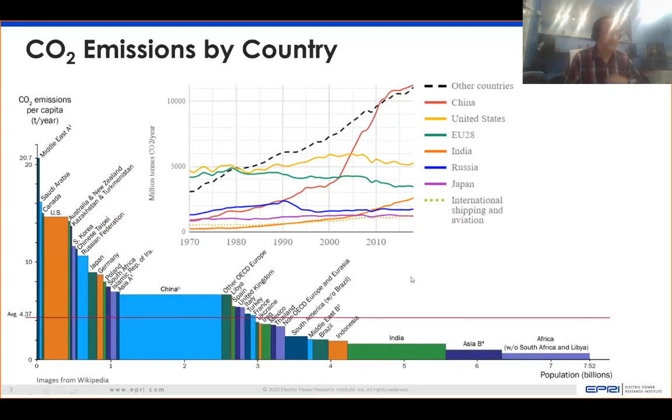In the face of economic expansion and energy needs for India, it's critically important that CO2 emissions be managed. Of course, per capita emissions for India are quite low still compared to the US and China, and even the world average. But nonetheless, India as a country does need to look at CO2 emissions.

If you take a look at CO2 emissions from the power sector, it's around 900 or maybe slightly more than 900 million metric tons a year - this was as of December 2018. I didn't get a chance to look at more recent numbers, but let's say it's slightly less than 1 gigaton from just the power sector. As a country, India emits around 3 gigatons.

For onshore storage, if you look at carbon capture, you then have to do something with the CO2. There are very wide-ranging estimates for how much CO2 could be stored onshore - subsurface storage is anywhere between 75 to 525 gigatons. Offshore is even larger, in the hundreds of gigatons to a couple thousand gigatons. So the point is that in potential, there's a reasonable amount of CO2 storage available in India relative to emissions from the power sector.

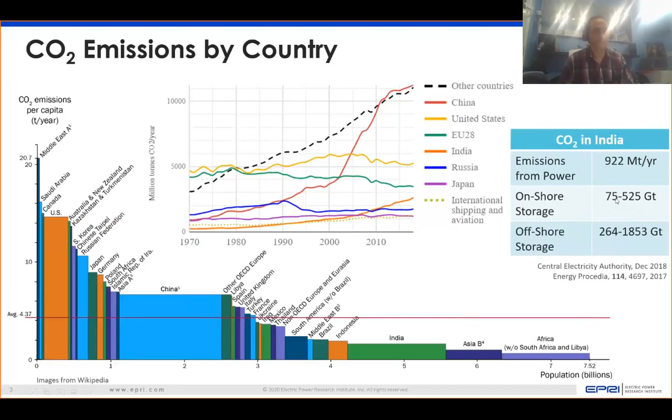So what exactly is CO2 capture and storage on fossil power? I won't spend much time on this since most people are familiar with post-combustion capture, where you take coal or any fossil fuel and separate CO2 from predominantly nitrogen, then compress and dehydrate the CO2. You can also do pre-combustion capture, involving gasification followed by water gas shift and CO2-hydrogen separation. Then there's oxy-fuel combustion, where you separate air into oxygen and nitrogen, and combust fuel in a pure or mostly oxygen stream.

In all these approaches, there's a separation step involved, and that really drives the cost and energy involved in CO2 capture and storage. Once you have the CO2 separated, you compress and dehydrate it, and typically inject it into subsurface aquifers, which is the storage capacity I mentioned previously.

In the case of a post-combustion process, you have a boiler followed by SCR, electrostatic precipitators, and now FGDs. The thought is to add an additional environmental control unit - CO2 capture. In the case of coal, CO2 is about 12 to 15% of flue gas. With natural gas combined cycle, it's 3 to 4% or so. In some cases, it's advantageous to recycle the CO2 back to increase its concentration, making capture easier.

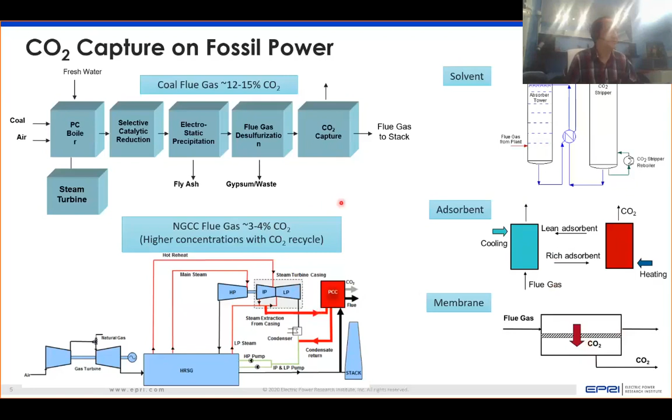But it's really not a problem when you look at the global picture. Why do you want to do this? The Intergovernmental Panel on Climate Change has estimated that climate change mitigation will be two times more expensive if people don't have access to CCS, because it's needed as a low-cost option to meet the climate targets I mentioned in the first slide.

But the question is, what happens when you get the CO2 captured? Then what can you do with it? One option is chemical conversion, converting CO2 into something. But essentially all of the CO2 emissions the world emits is far larger than any carbon used by the entire chemical industry. So even if you converted all the CO2 into some kind of chemical, there would still be vastly more CO2 emissions from the world.

So there's very limited opportunity here in converting CO2, but there can be niche opportunities depending on the area. There's an opportunity to convert CO2 back up to a fuel, but that's a thermodynamically uphill process. It is a fairly large market, but we need CO2-free energy sources to make this uphill process go. But then the question is, if such sources are available, it's probably better to just reduce fossil fuel use and use a CO2-free energy source directly, particularly for energy storage. So there's limited opportunity here as well.

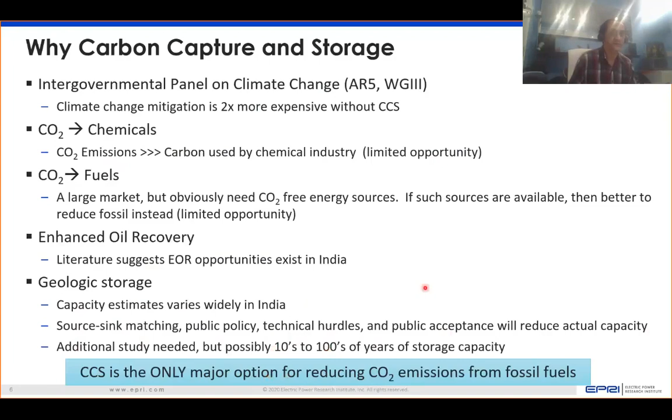Since I was asked to talk about the latest trends in CCS, I thought I'd show you some recent work from the Global CCS Institute in Australia. This is a map of all the CCS projects in the world. There's 51 total: 19 are operating, 4 under construction, 10 in advanced development, and 18 in early development. There's actually a CCS operation in India itself.

This is a company called Carbon Clean Solutions, based both in India and the UK. It's running a CO2 capture system on a 10 megawatt slipstream of flue gas from a coal-fired power plant outside of Chennai. The CO2 in this case isn't sequestered underground, but used to convert to soda ash. There's enough of a market at small scales for this process to be economical, and I believe it was started up about 3 or 4 years ago. So India is certainly active in the CCS space as well.

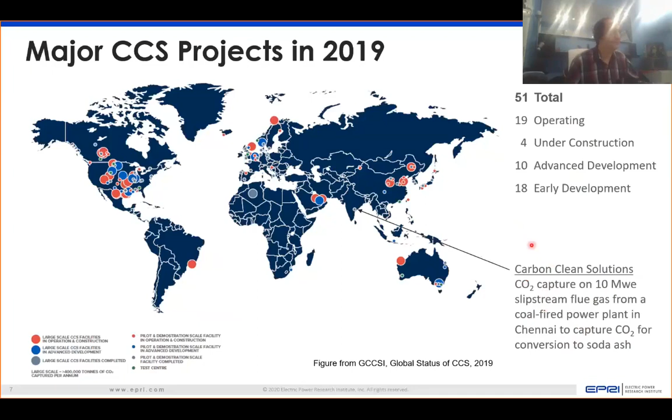But in terms of large-scale reductions, more work needs to be done. If you look at what kinds of projects these are, they span many different industries: waste incineration, cement, chemical production. Natural gas processing is a very large area where CCS has been operating, and this is not a new technology - it's been around since at least the 1930s, close to 100 years now, much of it applied to natural gas processing. For power generation, the red ones here are in operation, and there are only two: one is Boundary Dam in Canada.

The CO2 in this case is captured and sent to an oil field about 100 miles away for enhanced oil recovery. The second one in the world is actually in Texas here in the U.S., and this is Petra Nova.

In this case, it's the same idea of capturing CO2. It's about a 250 megawatt stream out of the power plant, and the CO2 is again captured and sent about 100 miles to an oil field in Texas.

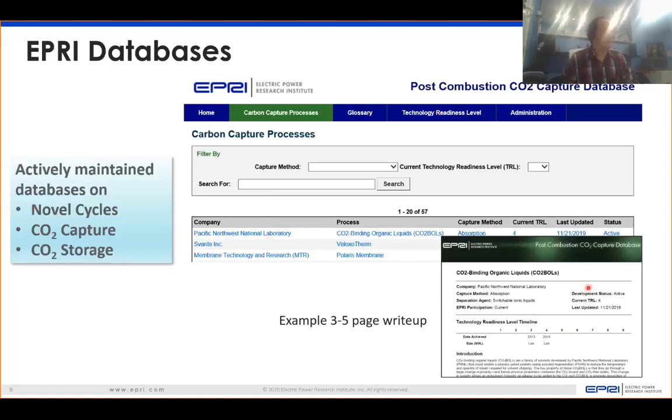EPRI is heavily involved from very early stage research all the way to late stage research in a variety of these technologies in our research program.

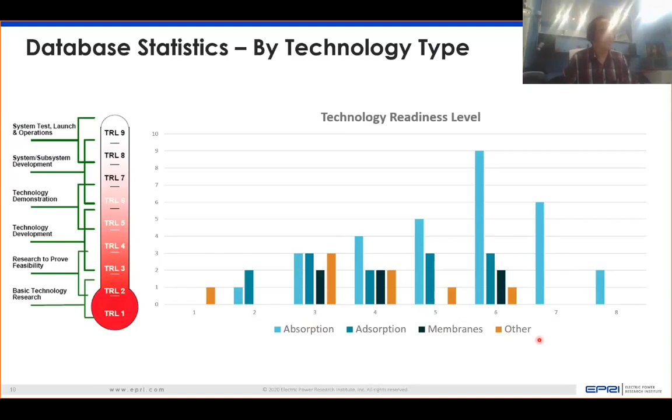The levelized cost of electricity actually goes up - about 77% for a coal case and about 72% for an NGCC case. A lot of the research which we and other people around the world are pursuing is to reduce the cost of CCS, primarily these costs.

Mr. Gupta is absolutely correct that the mitigation here is looking at reducing CO2 leakage from subsurface reservoirs and groundwater contamination as well. I should mention that those are fairly well understood processes, but certainly large-scale injection needs to be done in the world.

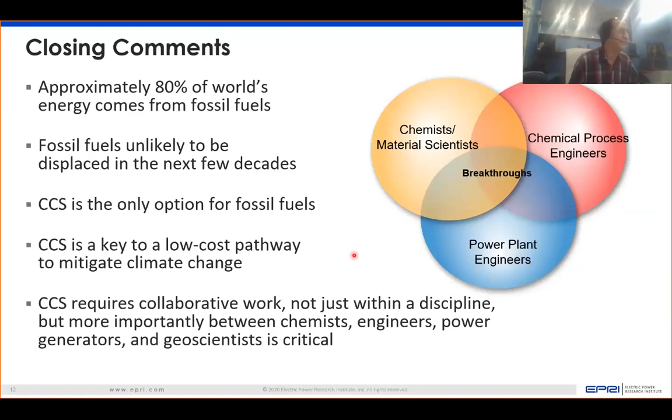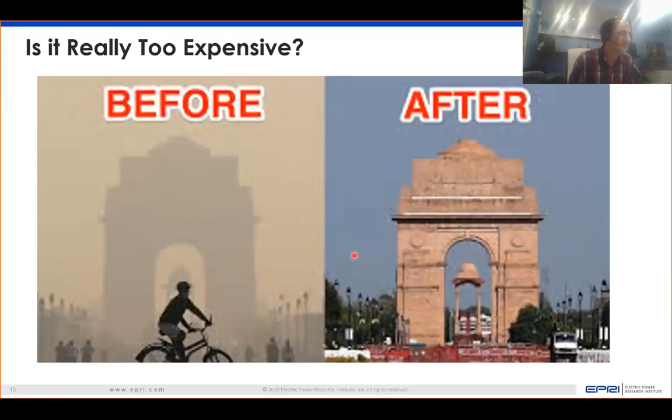On carbon capture and storage, you have rightly said that in the coming 2-3 decades, fossil fuels will likely still play a major role in the power sector. And if they continue to play that role, CO2 capture is going to be very important, because the world cannot miss that 2 degree centigrade target. We cannot afford to miss it, because climate change is going to cause havoc for us. Already across the world the climate is undergoing a big change, leading to floods, cyclones, drought, and heavy rains. The pattern everywhere has changed.

You have given us insight into CO2 capture: post-combustion, pre-combustion, either through solvent, adsorbent, or membranes. Geological storage appears to be the option today. The only problem with countries like India is the cost. We want to give affordable electricity to our people so their dream of a quality life is fulfilled. CO2 capture today will increase the cost, almost double it. If you look at the levelized cost, it's 70-80% higher. And that technology we have to get from most of the advanced countries.